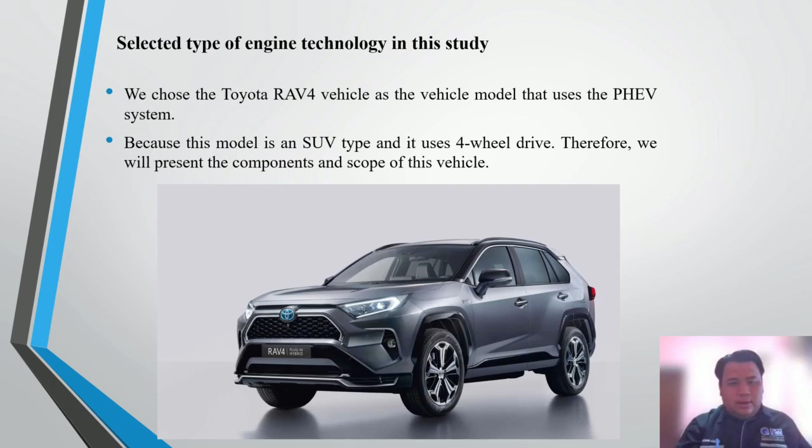For the selected type of engine technology in this study, we chose the Toyota RAV4 vehicle as a model that uses the PHEV system. Because this model is an SUV type and uses four-wheel drive, we will present the components and scope of this vehicle. Next, for the background of a plug-in hybrid electrical vehicle.

For the Toyota RAV4 hybrid engine, 0 to 62 mph acceleration. Toyota refers to the RAV4 hybrid petrol-electrical full hybrid setup as its dynamic force engine. It pairs a 2.5 liter four-cylinder petrol engine with an electrical motor, producing 215 bhp in front-wheel drive and 219 bhp in the four-wheel drive variant.

Performance is swift enough: 0 to 62 mph takes 8.4 seconds with front-wheel drive and 8.1 seconds with four-wheel drive. It feels responsive enough to be reassuring even if you need to merge into fast traffic or overtake, and you can even switch it into sport mode for sharper steering and throttle response.

Next, an overview of the Toyota RAV4. For engine type, it uses plug-in hybrid. Transmission uses continuously variable speed automatic, CVT. Drive type uses electronic on-demand all-wheel drive, AWD, with all-wheel drive integrated management and a multi-information display monitor. Cylinder layout is inline 4, combined MPG is 39, EPA combined MPGe is 94 MPGe, total seating is 5, and basic warranty is 3 years or 36,000 miles.

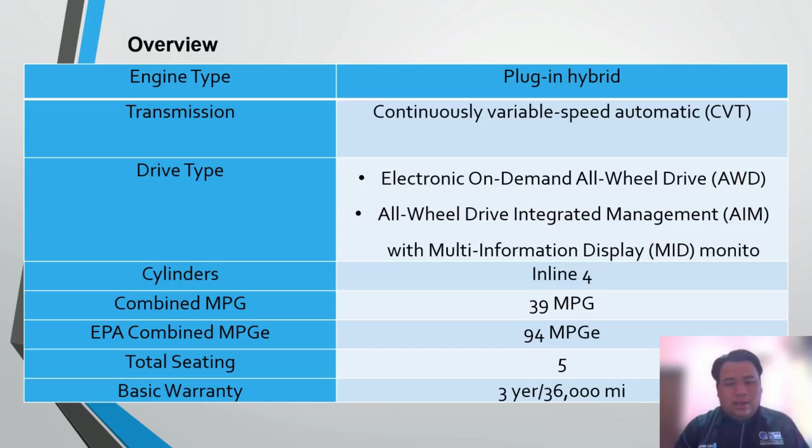Next, for the Toyota RAV4 plug-in hybrid engine: it uses a 2.5 liter dynamic force 4-cylinder with sport, eco, normal, trail, and electric vehicle modes. For the electric vehicle charge hold, the Toyota RAV4 uses 302 combined net HP, with the internal combustion engine producing 176 HP at 5,300 RPM. The electric motor power output, front/rear, is 179/53 HP, 134/40 kilowatt, torque, front/rear 199 or 89 lb-ft.

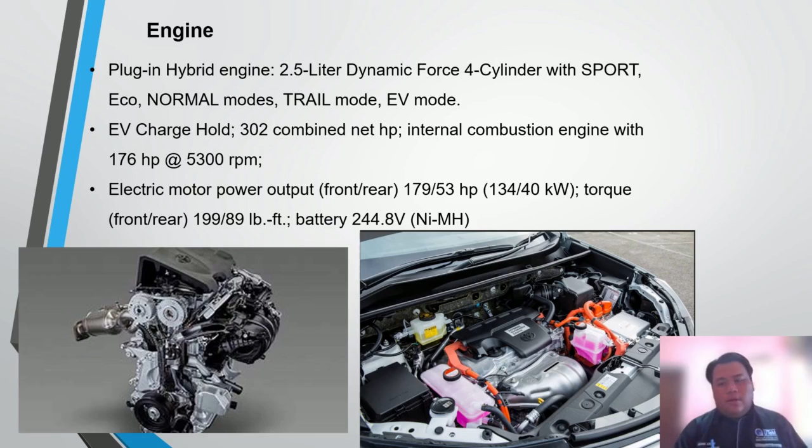It uses a battery at 244.8 volts. For electric vehicle traction battery type, the Toyota RAV4 uses a sealed nickel metal hydride, NiMH, at 244.8 volts. For transmission, the Toyota RAV4 uses an electronically controlled continuously variable transmission, ECVT, with sequential shift mode, and continuously variable speed automatic for the CVT.

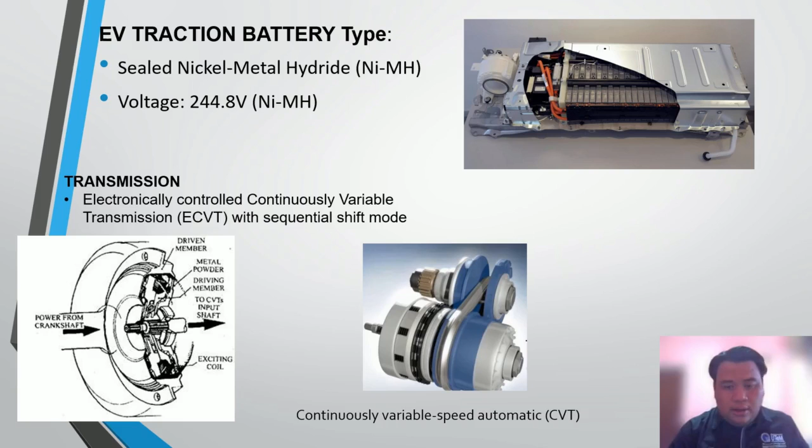Next, for the features: the Toyota RAV4 uses TRD off-road capability, dynamic torque vectoring AWD with rear driveline disconnect, multi-link rear suspension, and multi-terrain select, and lastly exceptional ride, handling and comfort. Although it uses a plug-in hybrid engine, the characteristics of an off-road vehicle can still be felt while driving.

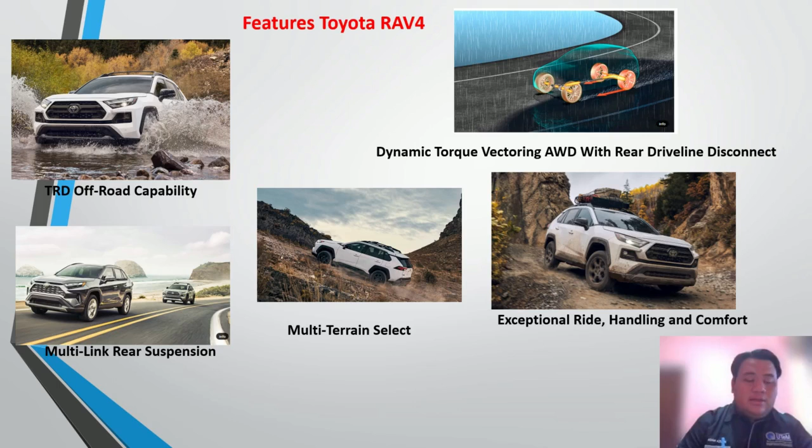A plug-in hybrid electric vehicle is a hybrid electric vehicle whose battery pack can be recharged by plugging a charging cable into an external electric power source, in addition to being charged internally by its onboard internal combustion engine powered generator.

Now for the next slide: examples of vehicles using the selected technology.

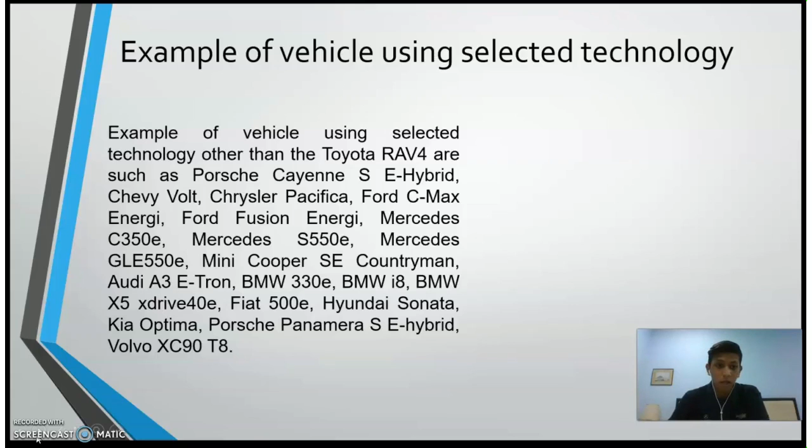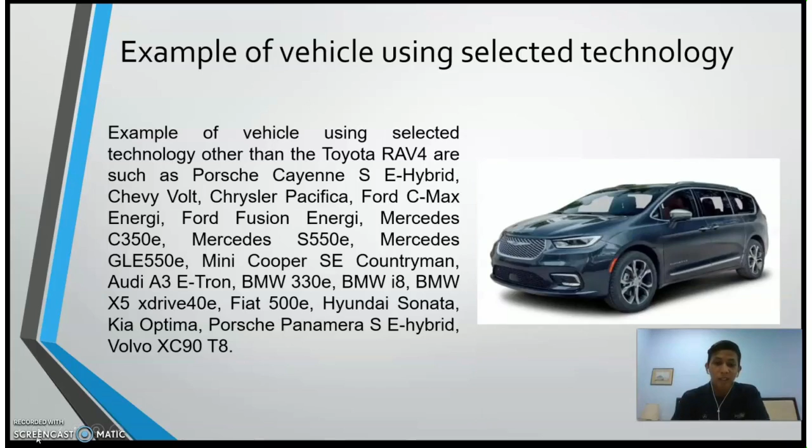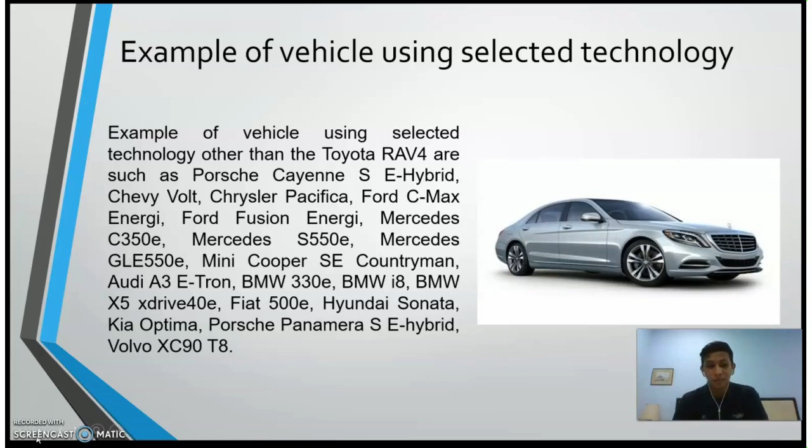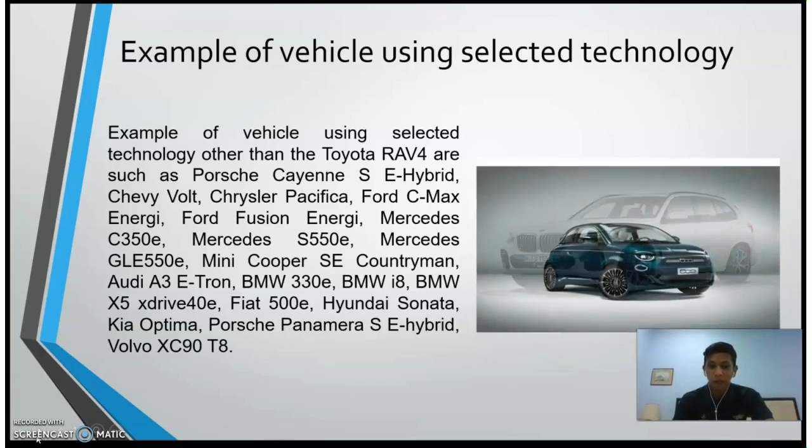Examples of vehicles using the selected technology other than the Toyota RAV4 include: Porsche Cayenne S E-Hybrid, Chevy Volt, Chrysler Pacifica, Ford C-Max Energi, Ford Fusion Energi, Mercedes C-Class, Mercedes S-Class, Mercedes GLE, Mini Cooper S E Countryman, Audi A3 e-tron, BMW 330e, BMW i8, BMW X5 xDrive40e, Fiat 500e, Hyundai Sonata, Kia Optima, Porsche Panamera S E-Hybrid, and lastly Volvo XC90 T8.

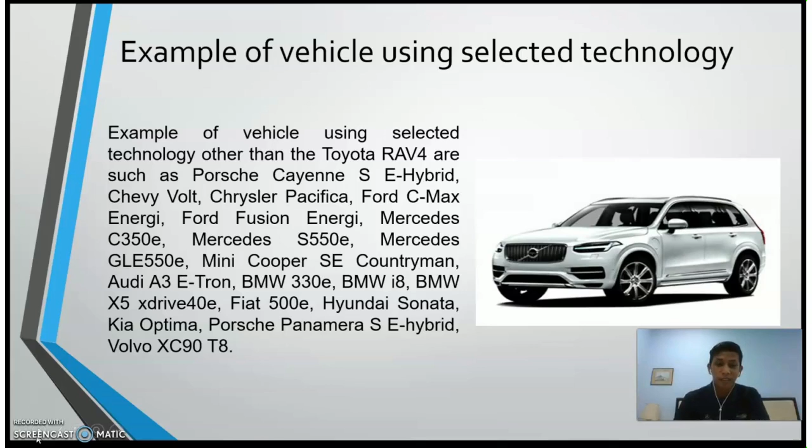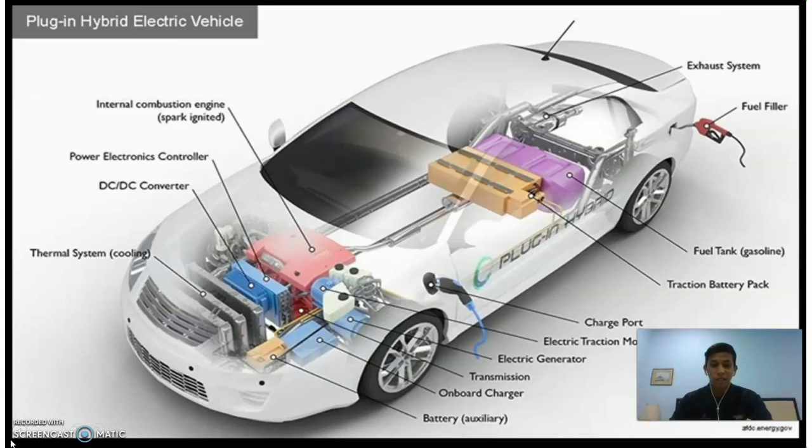This is our component breakdown for the plug-in hybrid electric vehicle, PHEV. We take just the basic parts — there are 7. Truly there are many more parts to know, but we just take the basic ones.

First, the auxiliary battery provides electricity to start the car. Second, the charge port allows the vehicle to connect to an external power supply. The electric generator generates electricity from the rotating wheels. The electric traction motor uses power from the traction battery pack and this motor drives the vehicle wheels. The power electronic controller controls the speed of the electric traction motor and the torque it produces.

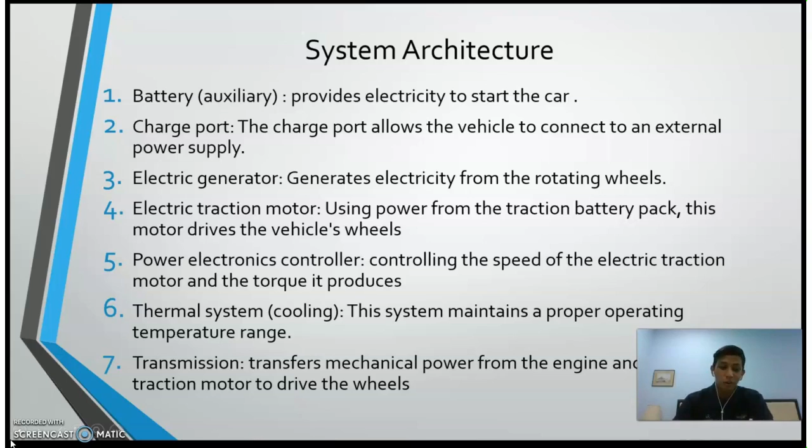Second last, the thermal system — this is the cooling system — maintains a proper operating temperature range. And lastly, the transmission transfers mechanical power from the engine or electric traction motor to drive the wheels.

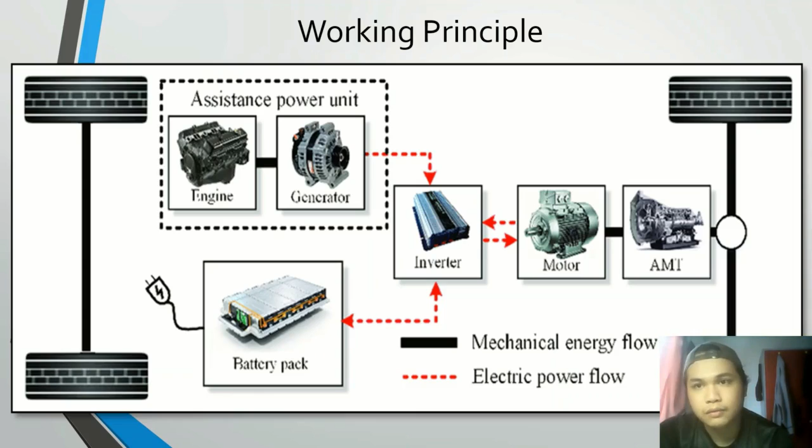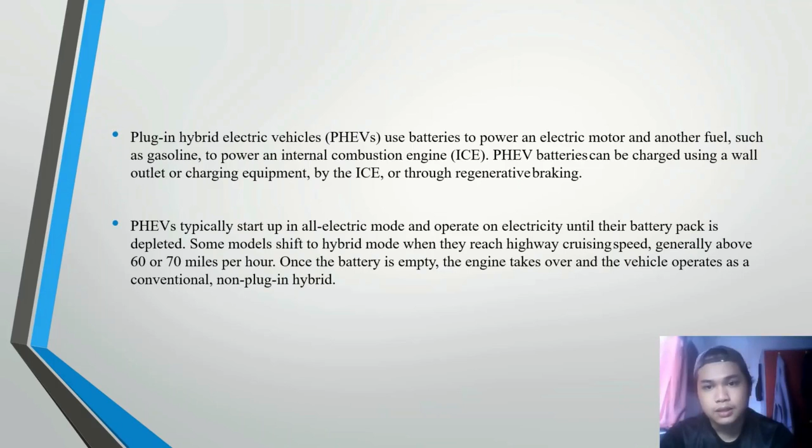A plug-in hybrid electric vehicle uses its battery to power an electric motor and another fuel, such as gasoline, to power its ICE. The PHEV battery can be charged using a wall outlet or charging equipment, by the ICE, or through regenerative braking. PHEVs typically start up in electric mode and operate on electricity until the battery pack is depleted. Some models shift to hybrid mode when they reach highway cruising speed, generally above 60 or 70 miles per hour. Once the battery is empty, the engine takes over and the vehicle operates as a conventional non-plug-in hybrid.

It depends on how big the battery is and whether you charge using a regular 120 volt outlet, a 240 volt charging station, or a fast charger. Plug-in hybrids with a smaller battery can recharge in about 3 hours at 120 volt and 1.5 hours at 240 volt. Electric vehicles with larger batteries can take up to 20 plus hours at 120 volt and 4 to 8 hours using a 240 volt charger.

The fuel efficiency of an electric vehicle may be measured in kilowatt hours per 100 miles. To calculate the cost per mile of an electric vehicle, the cost of electricity and the efficiency of the vehicle must be known. If electricity costs 13 cents per kilowatt hour and the vehicle consumes 33 kilowatt hours to travel 100 miles, the cost per mile is about 4 cents.

If electricity costs 13 cents per kilowatt hour, charging an electric vehicle with a 200 mile range will cost about $9 to reach a full charge.

Next is the Toyota RAV4 environmental performance and specifications. As you can see here, the fuel consumption for the Toyota RAV4 is in liters per 100 kilometers. The combined speed fuel consumption is about 1 liter per 100 kilometers. In low speed it is about 7.7 liters per 100 kilometers. In medium speed it is 5.3 liters per 100 kilometers. In high speed it is 5.7 liters. And in extra high speed it is 7.7 liters per 100 kilometers.

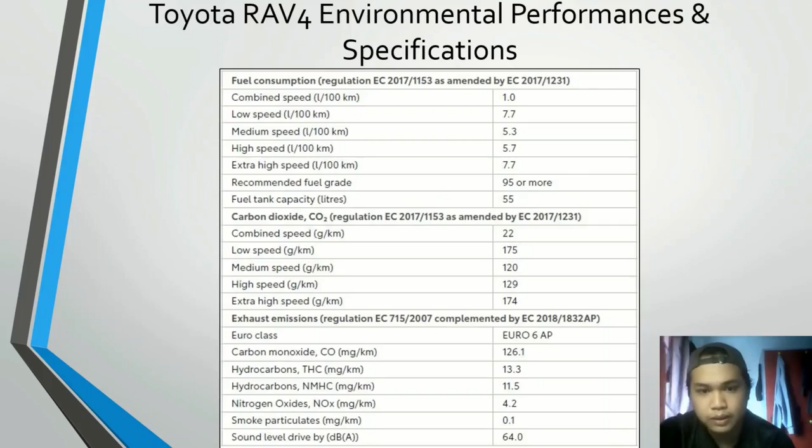I want to explain my part, which is a discussion of the advantages and disadvantages of PHEV used on the Toyota RAV4. The first advantage is zero or no emission when driving on the batteries. Second, the PHEV is easy to drive due to its technology or system. Third, it is fuel efficient in traffic jams. Next, the tax is efficient for the PHEV. The next point is that the PHEV is cheap to run if doing regular 10 to 15 mile commutes.

Now the disadvantages. The first point is that it is relatively expensive. The second point is that the battery life of the PHEV is a concern. Then, the fuel economy is not very good on motorway journeys. Also, abundant energy is used in battery manufacturing, and lastly, the system or technology of the PHEV is complex to maintain.

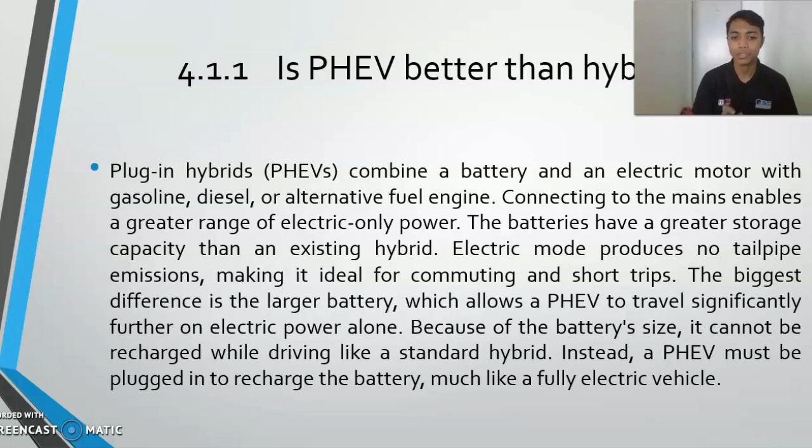Next, is PHEV better than hybrid? The PHEV, or plug-in hybrid, combines a battery and electric motor with a gasoline, diesel, or alternative fuel engine. PHEV connecting to the mains enables a greater range of electric-only power. Other than that, PHEV has a battery with greater storage capacity than existing hybrids, and the PHEV's electric mode produces no tailpipe emission, making it ideal for commuting and short trips. This allows the PHEV to travel significantly further on electric power alone, because the battery of the PHEV cannot be recharged while driving like a standard hybrid. Instead, it is important that the PHEV must be plugged in to recharge the battery, much like a fully electric vehicle.

Next, future prospects for PHEV technology. In my opinion, PHEV is excellent and should be kept and improved in the future because it uses both electric and hybrid energy. PHEV can also assist in restoring the environment. Furthermore, PHEV technology makes it possible to reduce environmental pollution caused by the use of vehicle fuels such as diesel and gasoline. Among the car models that use PHEV technology is the Toyota RAV4, and PHEV is one of the alternate approaches to limit the use of fuel-powered automobiles.

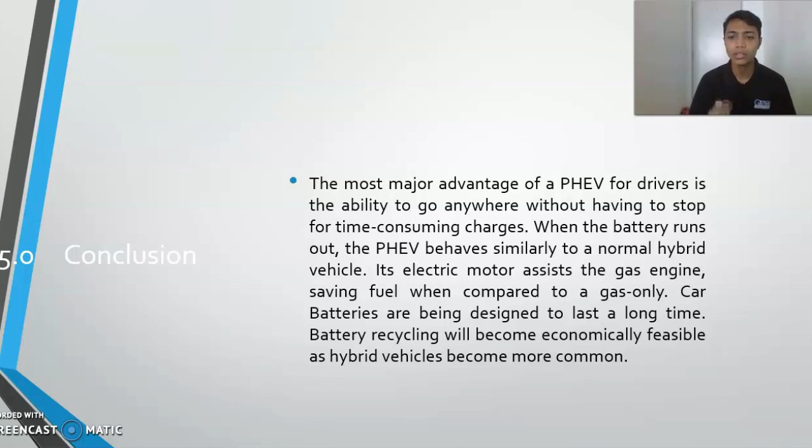Next is the conclusion. The major advantage of the PHEV for drivers is the ability to go anywhere without having to stop for a time-consuming charge. When the battery runs out, the PHEV behaves similarly to a normal hybrid vehicle. The electric motor assists the gas engine, saving fuel compared to a gas-only vehicle. The car battery of the PHEV is designed to last a long time. Battery recycling will become economically feasible as hybrid vehicles become more common.